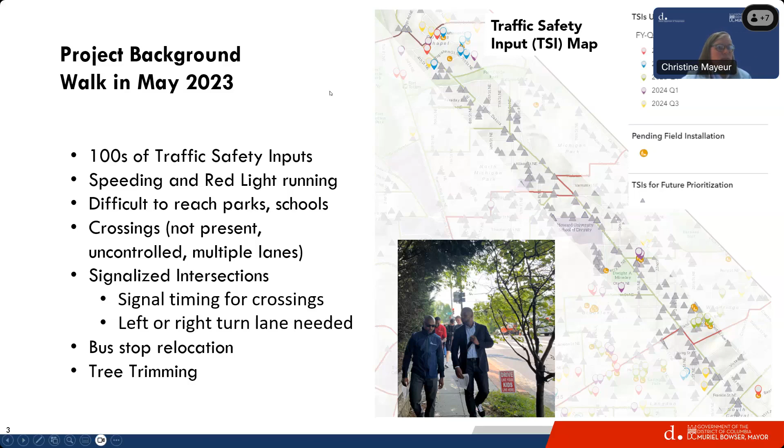More background. So in the FY24 budget, this is some of the text that was in writing, but the council member put in the funds for us to look at safety improvements along the corridor, possibly a road diet, and recommends considering two of these segments. What we thought as DDOT is to look at this and come up with a holistic study end to end, and then build what we could with the funds that we had.

Highlighting here that our high injury network includes roads in Ward 5. It does not include South Dakota Avenue, but South Dakota Avenue does intersect with Rhode Island Avenue and Bladensburg Road in our study area, which are high injury network corridors. So it's an opportunity to improve those intersections.

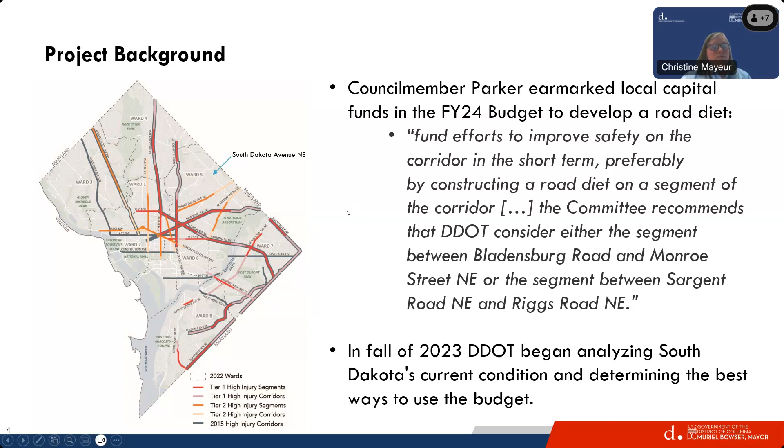Going into our existing conditions, the travel conditions for our residents: about 28% of households have no access to a vehicle on a daily basis. We see from traffic counts, average annual daily traffic is anywhere between 11,000 and 20,000 between different segments in the corridor. So at the lowest, about 11,000, at the highest point within Bladensburg to Riggs Road, about 20,000.

We see more residents in the community, however, do drive to work and have longer commutes. This may be due to working outside of DC or across the city and other areas. For pedestrian conditions, we do see continuous sidewalks across the street, but many uncontrolled and unmarked crosswalks along the corridor. We have trail and bike connections that are existing and future.

So Riggs Road will have a bicycle connection from the Met Branch Trail over to, I believe, South Dakota, the Met Branch Trail itself, working on Taylor Street as well in this coming fiscal year, and then Bladensburg Road as well coming up. On-street parking, we know is often unsigned or peak hour restricted. So this is something that's been raised as a concern. It's inconsistent across the corridor.

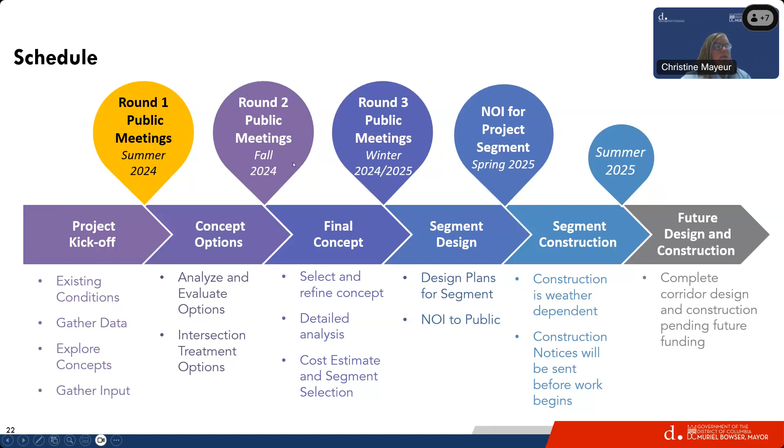So who else is DDOT going to talk to besides residents and people here tonight? ANCs, of course. Then we'll visit our advisory committees: the Multimodal Advisory Committee, Accessibility Advisory Committee, Pedestrian Advisory Committee, Bicycle Advisory Committee, Commission on Aging, schools, our faith-based institutions along the corridor, fire and EMS, Metropolitan Police Department, WMATA for bus coordination, hospitals and senior centers, civic associations, Howard University and future plans for the Divinity campus, Ward 5 Family Biking, and the Friends of South Dakota Avenue group that has formed for this project. If there are other groups you don't see on this list that you'd like us to engage with, please drop those in the chat so we're aware and can follow up.

So our next steps: we have this online feedback map, and I will pull that up and show how to submit your comments.

So this is a mapping platform. You'll see everything through here. This is the map that shows up.

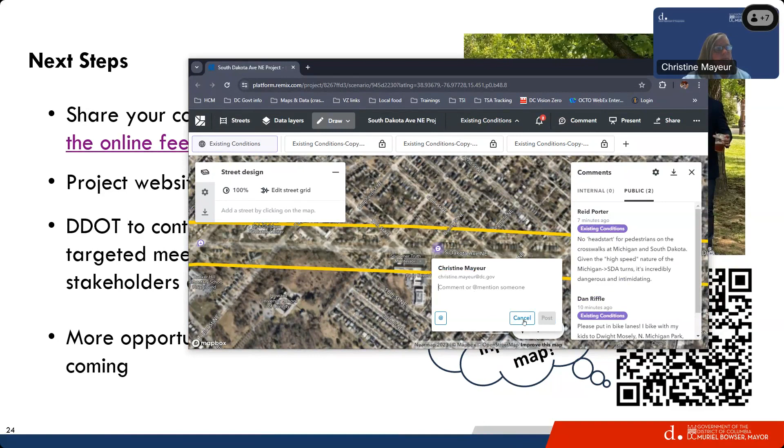And it's as simple as that. You can post as many or as few comments as you want, and let us know if you have any other feedback that you should know about.

We'll continue engagement. Like I said, you can expect to hear from us again in the fall once we complete the study of these few concepts. A project website will be coming soon. We'll house all the information through here, and then we'll continue engagement throughout the process.

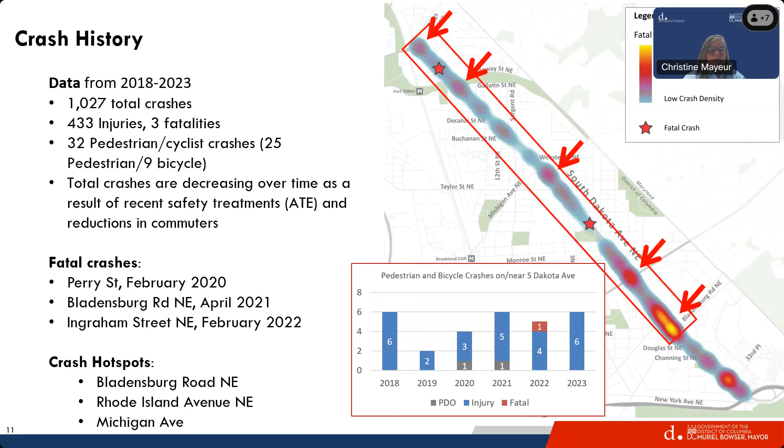What we saw from the traffic analysis we did with the traffic data that we have from pre-COVID times, looking at it, if we just take out a lane—agnostic to whether we use it for parking or bike lanes or whatever—what we saw was this is squarely in the range for a road diet. Let's see if I get to that traffic data we had here earlier.

11,000 to 20,000. Anything below 20,000 is squarely in the federal highway guidance for considering a road diet. It does say as you get closer to 20,000, you need to do a corridor analysis. That is what we're doing, to determine what signal changes may be needed, what other accommodations, what turn lanes would be most feasible to help with operations of the corridor. But all of this is included and part of the study and analysis that we do.

Did I address all your questions? I think maybe I missed one.

No, the last one was about safety concerns as far as the air quality. So we are, as part of this, required to complete an environmental document, and that is run through our environmental process with our internal staff, and then we communicate that with Federal Highway. So the environmental issues are absolutely part of it, and we consider that through the process as well.

So therefore, if you're slowing down the traffic or making more congestion, how would that affect the worst air quality that already exists?

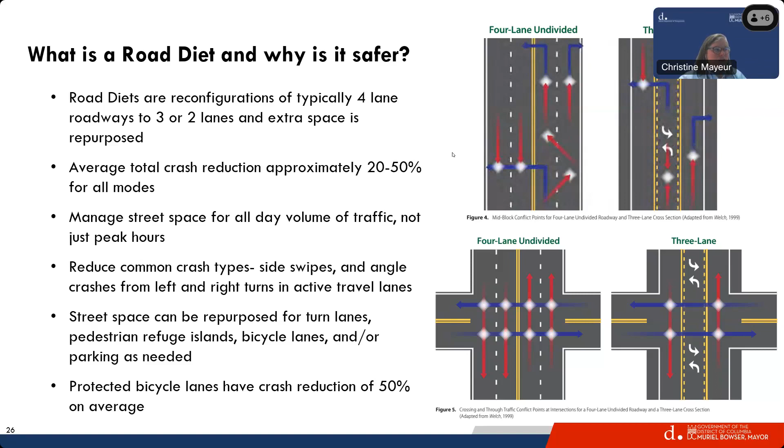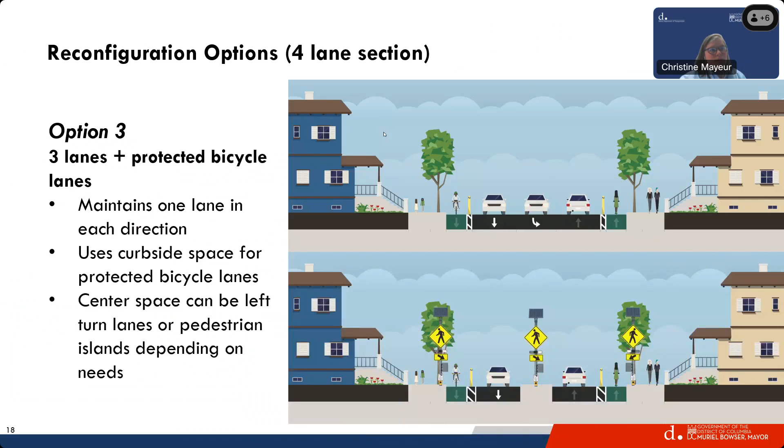Yeah, so this is a discussion that we are kicking off this project, and we are looking at all the options that are typically looked at for road diets, especially considering our long-range transportation plan and what that directs us to do. So this is just kicking off the project, letting you all know that we're going to be looking into this even further, and get your feedback on the existing problem areas. If you haven't already told us through TSI or other means, you can certainly reiterate your concerns on our map. But it is to share what we're going to be looking at, what we're going to be studying, and then moving forward into our next meeting coming in the fall. We'll come back to you with the concept options that we've studied, and then how they perform from traffic analysis, from crash, what we found from our in-depth crash analysis, and what we expect the safety improvements to be for all different modes. Thank you.

And I think the option when there's no bike lane is the best for my community. The density in my community with development projects on the books now will only get worse, and there's only 3 roadways to get from North DC from the Lamont community into Washington. You have 2nd Avenue and South Dakota. And if you change South Dakota by implementing the bike lane and reducing...

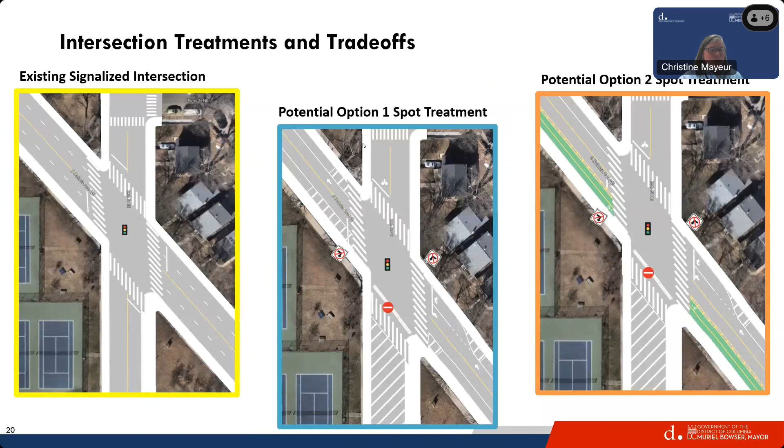So to your point about neighborhood streets and access, all options are on the table. We can certainly keep them open, but when we come back to you all, we're going to present some options for key locations where we've seen a high number of crashes, just to see what you think about the different ways we could manage safety there. It's definitely not the end-all-be-all of blocking off the side street, it's just one way of managing, making sure commuter traffic isn't speeding through our neighborhoods.

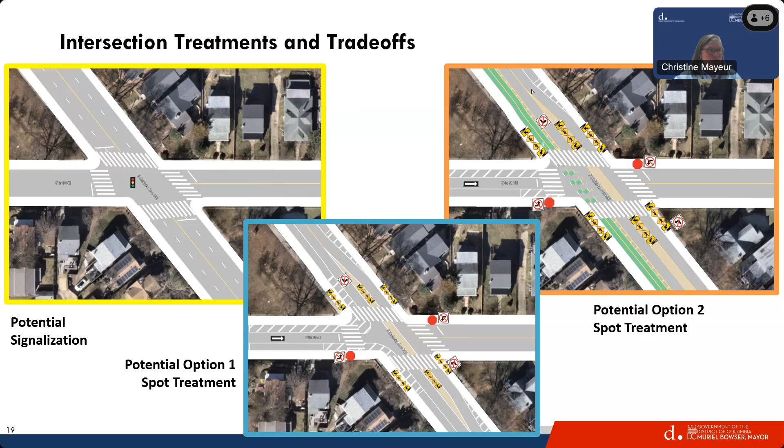I support option 2 first and option 3 second. I had a question about sidewalks. It's been a minute in the chat, but there was a suggestion that cyclists could just use the sidewalk to stay out of the streets and let cars go fast. I just wanted to point out that there's a bus shelter at Decatur that is right in the middle of the sidewalk. There are tree boxes that make it narrow in places, less than 2 feet. I'm sure neighbors would not like me riding my bike with my kids as they're coming out of their houses.

Same goes for anyone with a stroller, a wheelchair, a dog, or a child. And that's what we have to do right now, especially when I come home from the Fort Totten Metro — I go down the sidewalks because I'm sure as heck not going to ride on South Dakota as it is now.

So my question, and I think you answered this right at the top, is will there be any change or any widening to the sidewalks as part of this project? I'm assuming that since there's no change to the curbs, that's out of scope, correct?

That's correct, we wouldn't be able to address the sidewalks. Now, future long term, if there was a streetscape project, that is something we could look into. But while we're looking at the corridor, if there are tripping hazards or minor improvements we could make, we'll send our asset management team out there to address those issues at a smaller scale. But no, we do not have the funding to widen sidewalks.

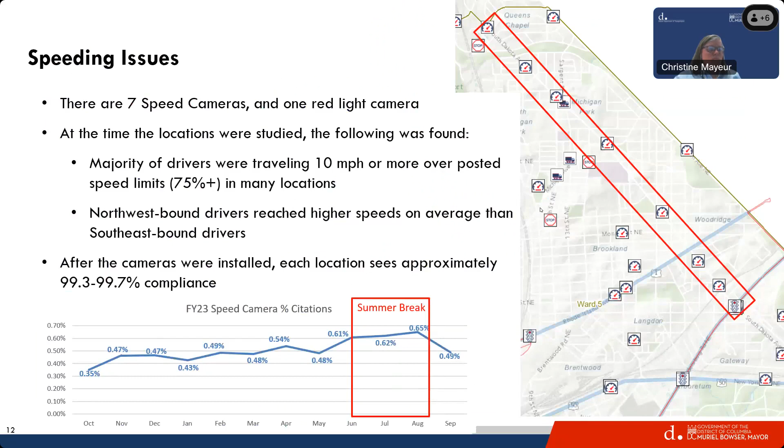Well, I'm talking about Costco traffic. I know we're jumping all around from different ones, but my concern is the Costco traffic pattern. It is horrible. I think someone needs to come and sit in that traffic with us and just take notes, and turn those two lanes back into the lanes like they had before.

I've even stopped police officers and asked if they could ticket these people, or sit there and watch these people do this day in and day out. But nothing was ever done. I've been fighting this for years.

So please do not put bike lanes on South Dakota, because I'm like the other gentleman, I try not to go down South Dakota. We normally come through the neighborhood where they've messed up the traffic pattern. I suggest that people need to come and sit in that traffic. They need to not do it just for one day, maybe for a week or two, a month. It really needs someone's close attention in that area.

I'm afraid someone's going to get hurt really, really bad. Thank you, Ms. Preston. So our study area only stops at Bladensburg Road, it does not go down to the Costco area. But we will look at operations and safety conditions there. We do want to reduce the number, amount, and severity of crashes that occur for drivers as well. We don't want children or anyone to be harmed, no matter how they're traveling.

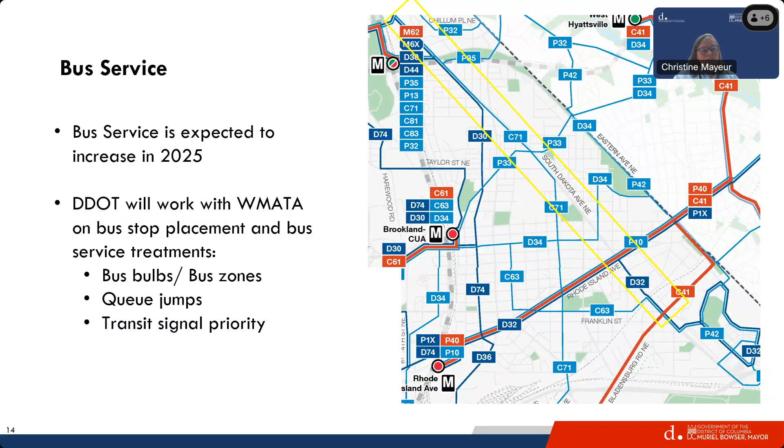I have driven out Irving Street by Vets, the MedStar, which has total disruption, and I can count the times I have seen bikers. I'm not understanding why this biking is becoming such a demand when we are riding on these streets, we don't see the bikers.

Secondly and lastly, alternate streets is not the answer. You say, oh, we can put speed humps. Why change our streets to inconvenience those residents who chose to buy our properties on the streets where we live, to accommodate commuters? Basically, I'm against it 100%.

Putting our alternate streets available, we will still have people being injured. I'm sorry to hear about the 14th Street poor little child who was killed, but you're going to take it from one street to put it in another? That's not going to solve the problem - it's going to make a problem for the alternative streets. I'm done with that. That's it, thank you for hearing me.

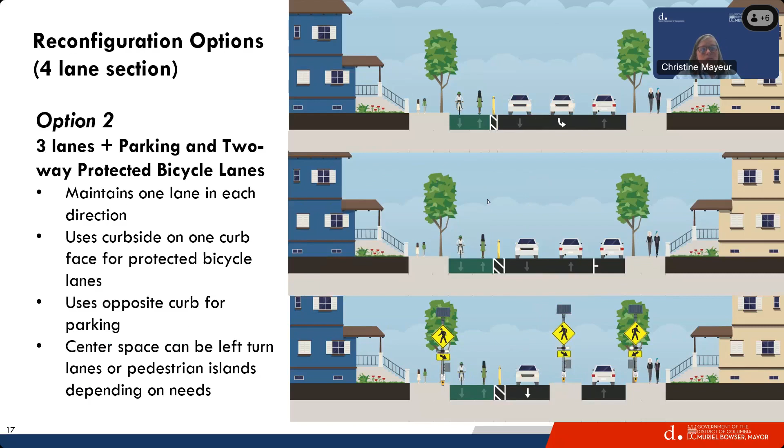For the side streets, if our traffic analysis shows a need to mitigate and deter drivers, especially commuters, from using neighborhood streets, we'll use our traffic calming toolbox to do that, and present the options to you all to get the best treatment for those locations. We're still at the beginning of the study. These are the options: one without a bike lane, one with a bike lane plus travel lanes and parking, and one with no parking but travel lanes. We're exploring a couple different options, and if there are others you'd like us to look into, we can look at the feasibility of those and include them.

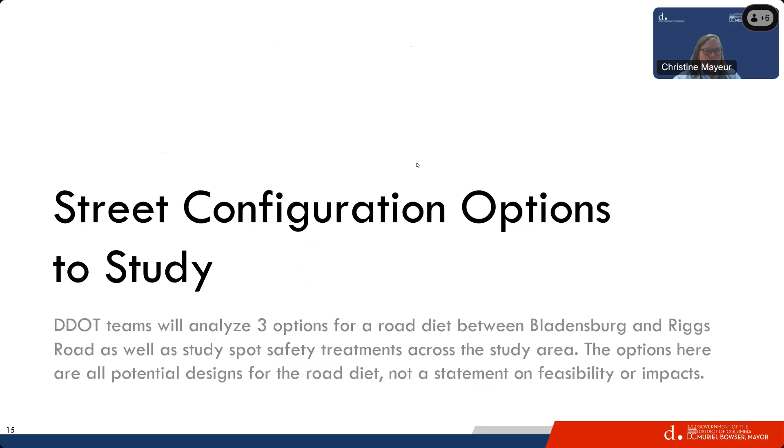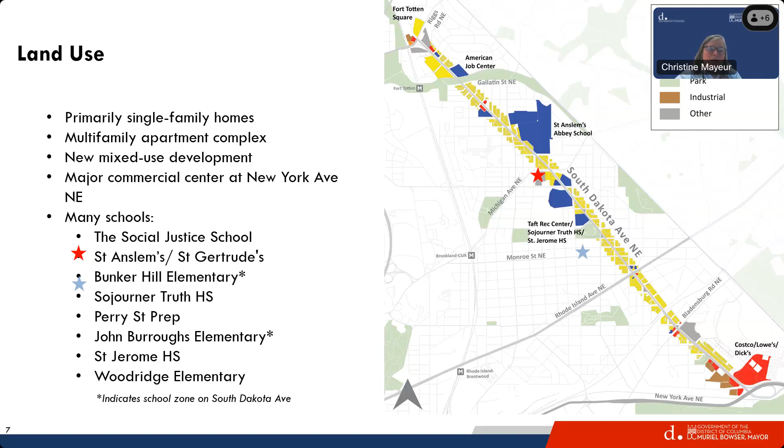What determines throughput is more so the signals, how many there are and how long they run. But given the land use I showed earlier, this is a neighborhood street, and it is used by commuters not from DC, often. So we want to redesign the street to better fit the neighborhood context, make it feel more like a neighborhood street, while still accommodating the levels of traffic we have. In road diets, we do not often see it affect the throughput of traffic. But we do find that commuters, especially those from Maryland and Virginia who may be using South Dakota Avenue to avoid other major routes, may find different ways and choose different routes, staying on the major interstates. Even in the higher traffic times pre-COVID, when we ran the traffic modeling, it did not affect traffic, and we were able to accommodate it. The purpose of a road diet is to accommodate all day demand so we don't see speeding off peak, and we actually get slower speeds all day and fewer crashes overall.

Thank you. But we will present the results of the study for each of these options when we come back to you all in the fall.